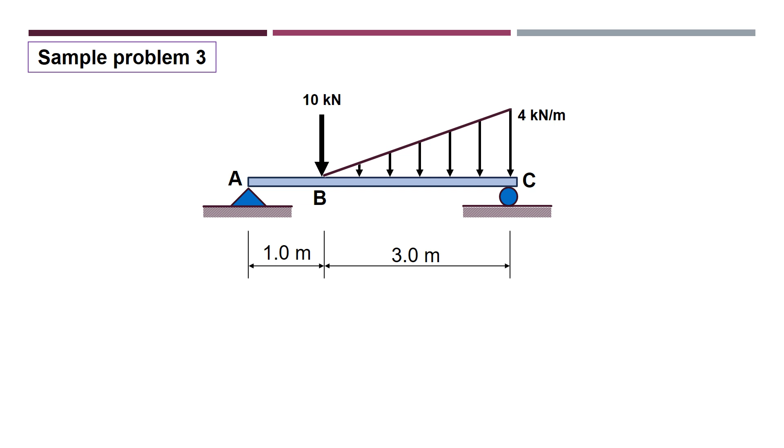So if we will solve for the reactions, ito ang makukuha nating reaction sa A with its components at sa C. So again, kahit 0 yung X component ng reaction, you still need to include that or show it in the diagram. Para kahit wala yung drawing or symbol ng hinge dito, alam natin na with these components, ang most probable na support dito is a hinge.

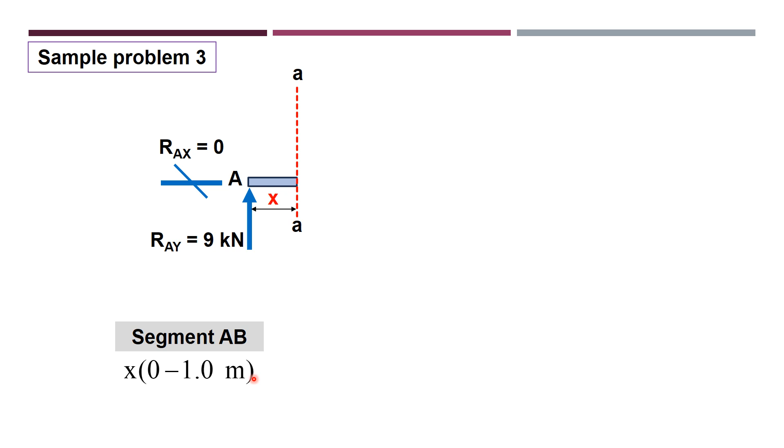And then, for the shear equation, we will sum up vertical forces to the left of the imaginary cutting plane. So we have the vertical reaction, upward, 9 kilonewtons. So we have the shear equation for AB, which is V equals 9. Then for the moment equation, we only have 9 kilonewtons, which will rotate in clockwise direction dito sa point na dinaanan ng imaginary cutting plane with distance x as its moment arm. So for the moment equation, we have RAY multiplied by x, or 9x.

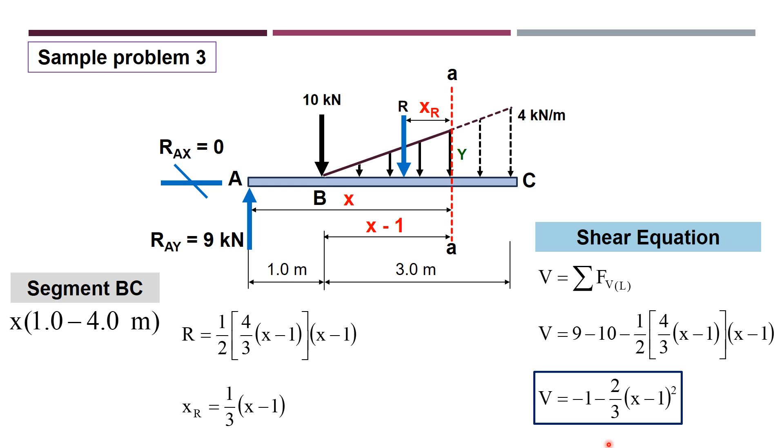So we have 9 minus 10 minus R. And our R is equivalent to this. So again, we have 9 minus 10 minus R, with this equivalent single force na R. So you simplify that, and you will get this shear equation for segment BC.

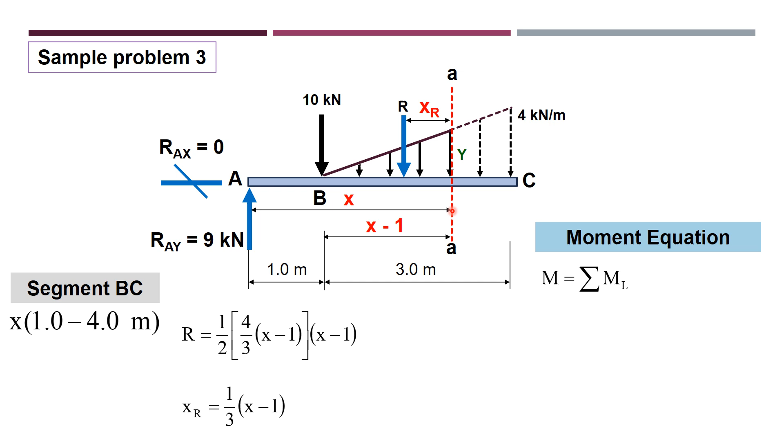For the moment equation for segment BC, we will sum up all the moments to the left of cutting plane AA. So again, we have these three vertical forces with their moment arms from the cutting plane. So we will just sum up their moments. We will consider clockwise moment mula doon sa point of application ng force hanggang doon sa cutting plane AA. So clockwise moments are positive, counterclockwise, negative. So this is our equation.

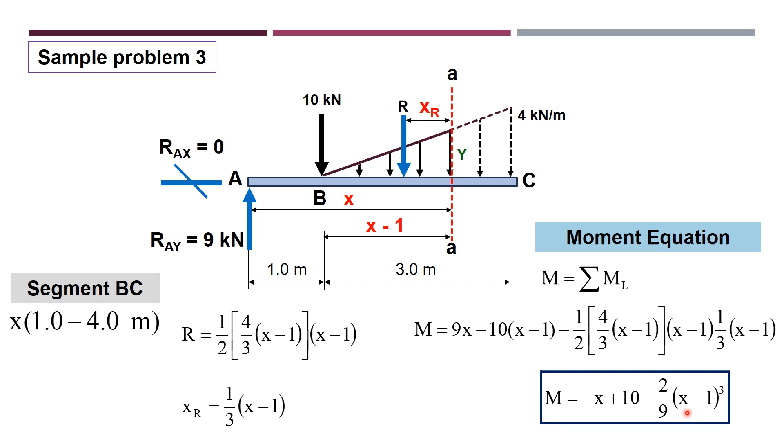So 9x will be clockwise, with its moment arm of x. 10 is counterclockwise with its moment arm of x minus 1. And R is counterclockwise with its moment arm x_R, which is this one. So this is now the formulated equation, and we need to simplify this para later on, mas madali tayong makapag-substitute ng values. And this is the simplified form of that. So you have negative x plus 10 minus 2/9 times quantity x minus 1 raised to 3.

Now, as I have said earlier, hindi na natin dadamihan yung ating coordinates; from end to end na lang ng bawat segment ang kukuhanan natin ng shear and moment values. And then we will apply the guidelines doon sa kung anong itsura ng line or curve, and even the degrees of the curve na i-apply natin sa bawat diagram na maidodrawing natin.

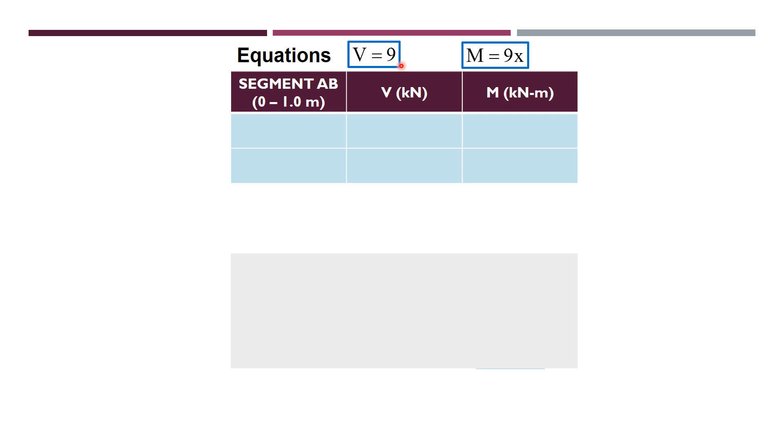So for segment AB, which is from 0 to 1, ang ating equations ay ito: V equals 9 for the shear equation, M equals 9x for the moment equation. And since from end to end ng AB ang kukuhanin natin, we have x equals 0 and x equals 1 na lang. And using the equations, ito ang values ng shear and moment for each value of x. So, we have here x equals 0.

Since wala tayong x dito as variable para mag-substitute, ibig sabihin, constant ang ating shear values between A and B. At dito tayo nagkaroon ng variable x, so that when x is 0, which is at point A, we have 0 moment. And when x is 1, we have positive 9 kilonewton meter. And then for segment BC, with these equations ng shear and moment, from end to end rin, when x is 1 and when x is 4. So you just substitute the values here.

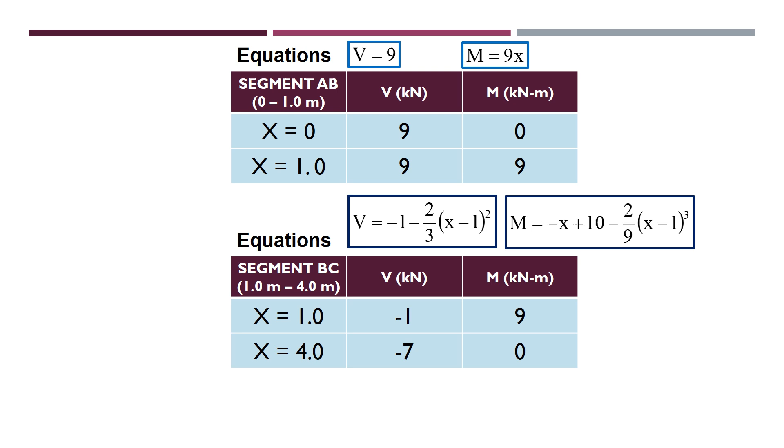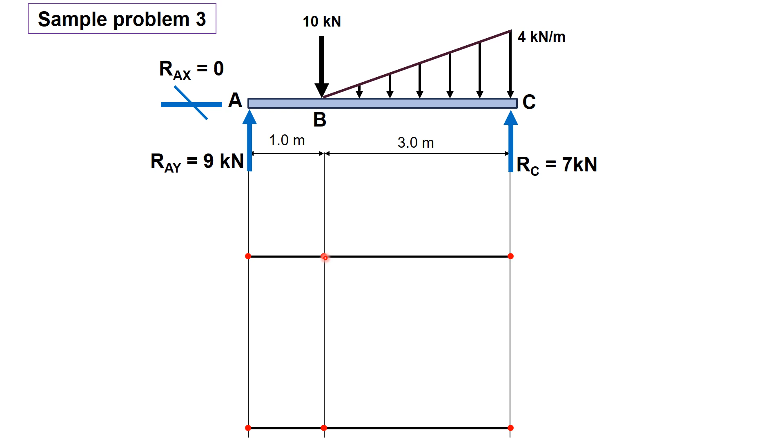And these are the shear and moment values. And then let us now plot the values. Okay, so ito yung ating beam. So as you can see, ang nilagyan ko na lang ng spot or ng points dito ay yung ends ng bawat segment. So this is for the shear and for the moment.

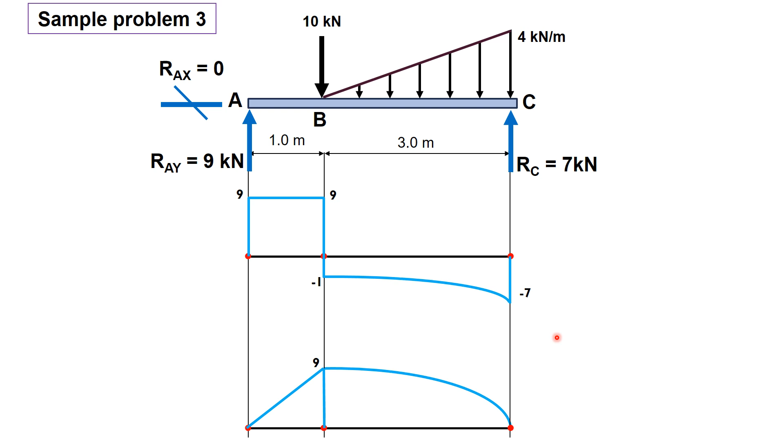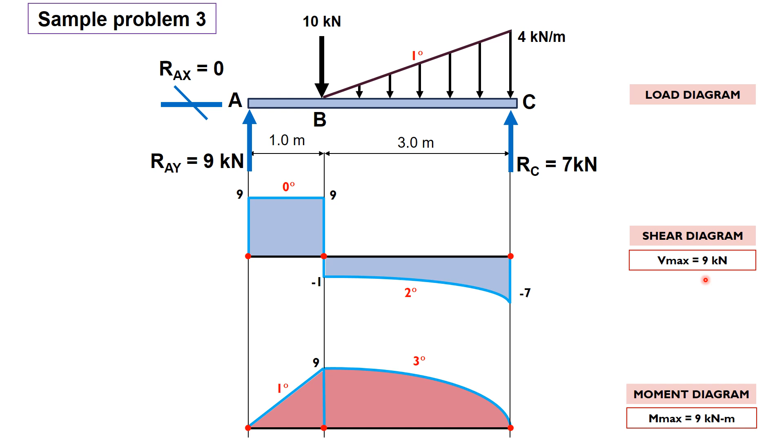So, to represent it clearly, lagyan mo ng degree ng curve. Kasi minsan, kahit na ma-drawing natin na naka-curve, parang hindi nga curved line eh, no? But you can indicate the degree of the line for each. Kagaya nito, this is 0, this is 1. Ito, nilagyan ko na rin dito, 1 degree, 2nd degree, and 3rd degree. And again, these are the maximum shear and moment values.